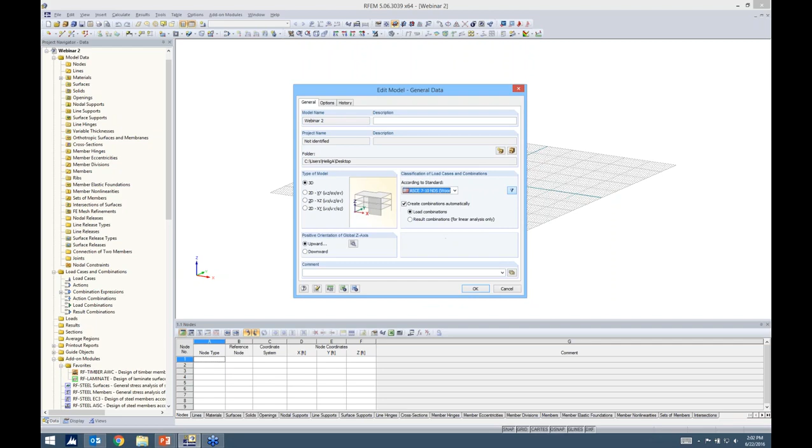So with that said, I'm actually just going to go ahead and jump right into RFEM. I'm going to use the PowerPoint concurrently with RFEM because I really want you to know how to apply some of the theories in the program as we model. So when you launch RFEM, this is the dialog box that you'll receive, and you just simply need to go ahead and give your model a name and define the type of model, 3D, with the orientation of the z-axis upward. For our load combinations, we actually have in here ASCE 7 for 2010, the NDS wood load combinations. I check the checkbox to create these automatically, then we simply click OK.

So some of you are familiar with RFEM, but for those of you who aren't, this essentially is the program. We have the tables for data input as well as our results down here at the bottom. We have our project navigator over here on the left. The project navigator can also be used for data input. We have our display tab down here. This is basically what controls everything in our view window here. We have views, which we'll be using today, and then once we run our results, we should get another tab down here that says results. And then, of course, we have all of our toolbars at the top for our modeling purposes as well.

So we want to begin today with our walls, and typically with walls we would want to go ahead and model them in this vertical direction. What I find actually easiest is to use line elements to begin with, and up here we just go ahead and choose new line in the toolbar, and you'll hear me say this quite often. We have a lot of AutoCAD-like features, which I think is one of the more powerful capabilities in RFEM. So not a lot of time will be spent trying to create very complex geometries because we have all these capabilities within the program itself, such as splines, polylines, arcs. So you can see for line options, we don't have only the typical straight line, but we can, of course, choose any one of these. For our application, we'll just go ahead with a single straight line.

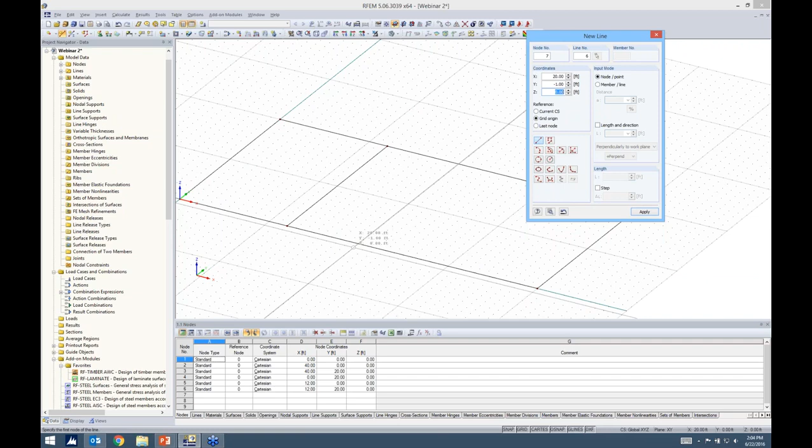Now all I'm doing is just using my drawing grid to draw a 40 by 20 outline of my building here, and you'll notice that I just snapped to the different points, and I'm going to add an intermediate wall, maybe right here at 12 and one more at 20. So we have nothing more than just these 1D line elements here, and what I can do is I can just select them, and I can right click, and under line I can go ahead and extrude the line into the surface. Something to note here, these are going to be cross-laminated timber panels.

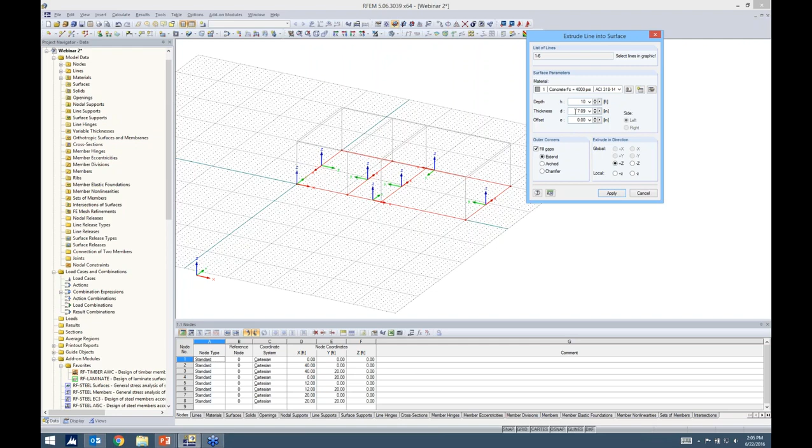So cross-laminated timber is not available in RFEM. In order to define all of those different layers and properties, we have to use our RF-LAMINATE module, which we'll be spending some time in a little bit later today. So it's worth noting that the material here for our panels doesn't matter. We can just go ahead and choose something very general such as concrete or steel, because all of this is going to be overwritten later by the add-on module RF-LAMINATE. So for now, concrete is fine. I want a height of 10 feet. The thickness doesn't matter either. That will be overwritten as well. So I hit apply, and now we can see that our walls are quickly generated.

Maybe we want to add some openings in these walls, and for this I'm going to go ahead and change my work plane. And you'll notice that that work plane is just on this front wall of this structure. Work planes are important because when we continue modeling here, the work plane really confines where you're exactly drawing your elements. So I don't have to worry about drawing clear out in space, or maybe accidentally drawing on this back wall. I'm going to be drawing where this work plane is set.

So as far as openings, our other toolbar up here has all the different openings. And again, we have just the typical rectangular opening, but we have all of these other options. So this can be super powerful when you're doing finite element modeling, or maybe you have a structure with some odd geometry for different openings in a slab or a wall. You can see here ellipses, polygons, anything that you really can think of.

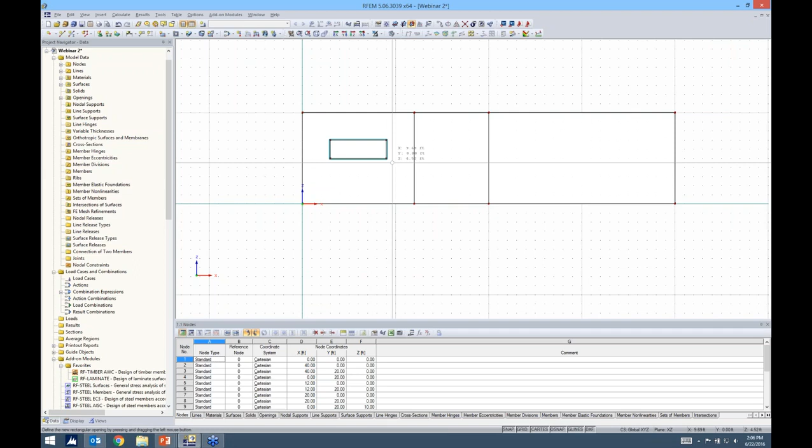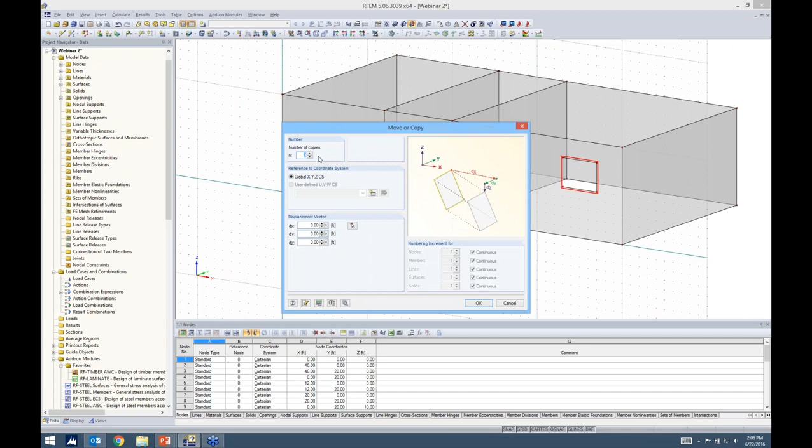For us, we'll go ahead and stick with a rectangular opening, and basically I'm just going to draw some windows here, nothing too complex. Maybe we want to draw a door opening here, and lastly a window over here. Now, as far as the windows for the back wall, I can just hold down my control key to select these openings. I'm going to use my move tool, and I'm going to create one copy and move it back 20 feet in the Y direction.

You'll notice I'm kind of going through modeling maybe a little bit quick. We have plenty of other webinars that have more basic modeling. I really want to get to the CLT and timber design, so that's why it may seem a little bit quick in terms of all of the modeling behavior.

Okay, so now that we have this defined, I'm going to go ahead and change my line grid now for my floors. I simply change the work plane again, and you'll see how quickly I can define my different origins, and now I'm at the top of the structure. We have this other button up here, and what this does is I can select all of the model. Now, instead of a single continuous line that previously existed up here, these are now broken up where the wall panels intersect.

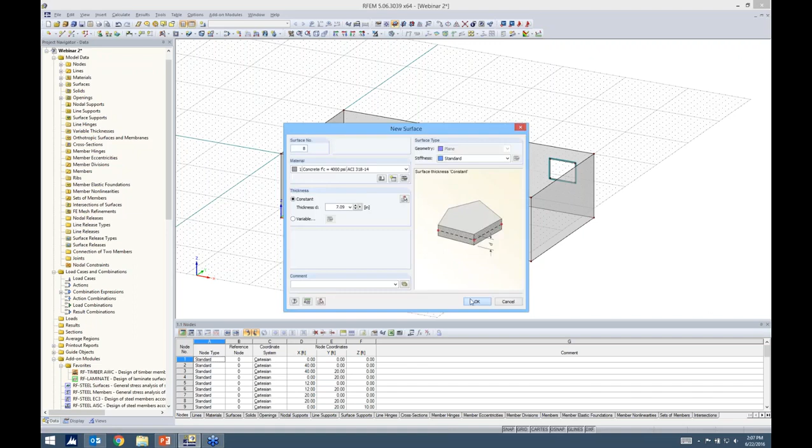And the reason for that is now I can create a surface by selecting my boundary lines. Again, the material doesn't matter and the thickness doesn't matter. This is CLT that we'll override at a later point. So now all I need to do for my floor elements is select my boundary lines and then do so for the second diaphragm. And we have our first floor.

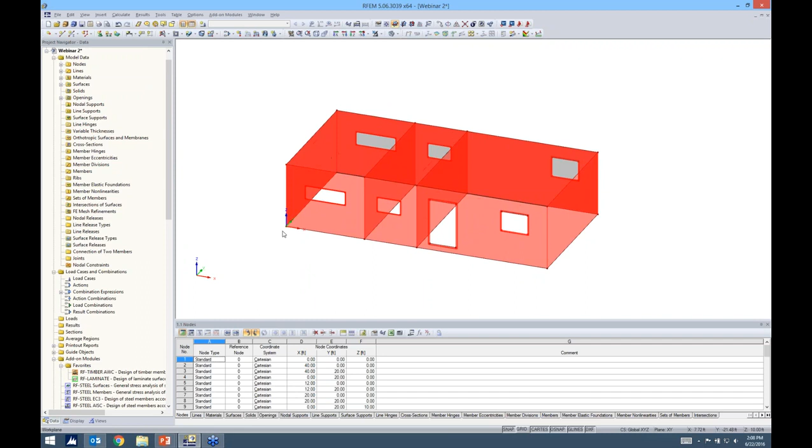Now we want to create our second floor. Well, that's just as simple as selecting our walls, and I was careful not to select the floor panels. I hold down my control key and I just drag and drop. Dragging and dropping is a very useful feature in the program to really save on some time for modeling. Maybe I don't want this opening up here at the top. I can just select it and delete it.

Now we want to create a pitch in the roof. So for this, I'm going to turn my rendering off to only a wireframe model. This way I can select all of these lines at the roof level and right click. I'm going to divide the line by n intermediate nodes, and I'm going to place one intermediate node at all of these lines.

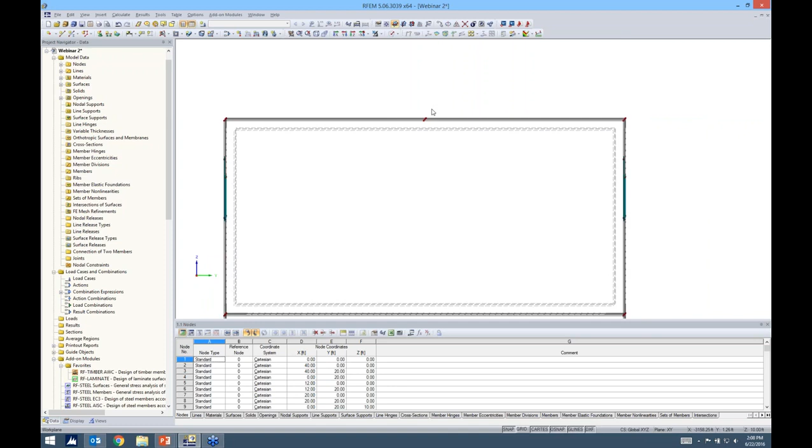So pretty simple. Now what I want to do is highlight only these nodes, and I will use our move and copy tool. This time, instead of creating a copy, I'm going to move these particular nodes in the positive Z direction 3 feet. So now you'll see that we have a pitch in the roof. Fairly straightforward.

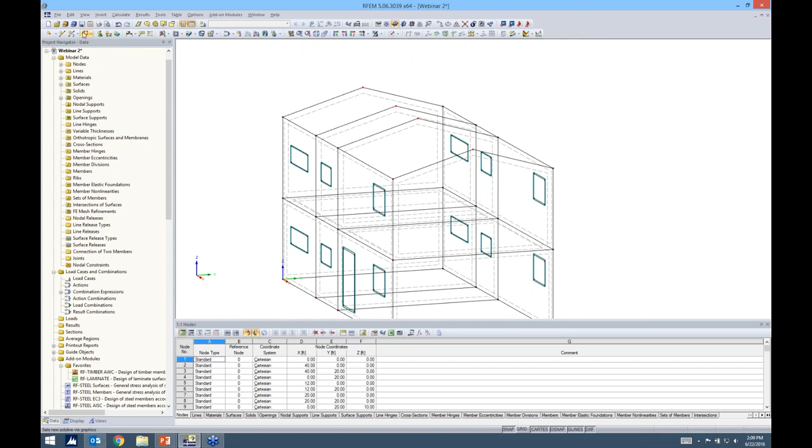So what we want to do now is draw our timber members. We click on New Single Member here, and you'll see that the member type is considered a beam. Several other options here, but for this type of application, we just want a typical beam member. We want to create a new cross-section, and up pops our cross-section library. For this, I want to choose standardized timber.

Then this dialog box will pop up for all of the different standardized timber sections. We can further filter according to AWC. We also have CSA in here, depending on which type you're exactly looking for.

You can also go ahead and choose a favorites group, and I created this favorites group USA, and basically I just added in a couple shapes that I'm using for today's webinar. So rather than sifting through all of those different shapes, you can create as many favorite groups as you like and add or delete any of these shapes here.

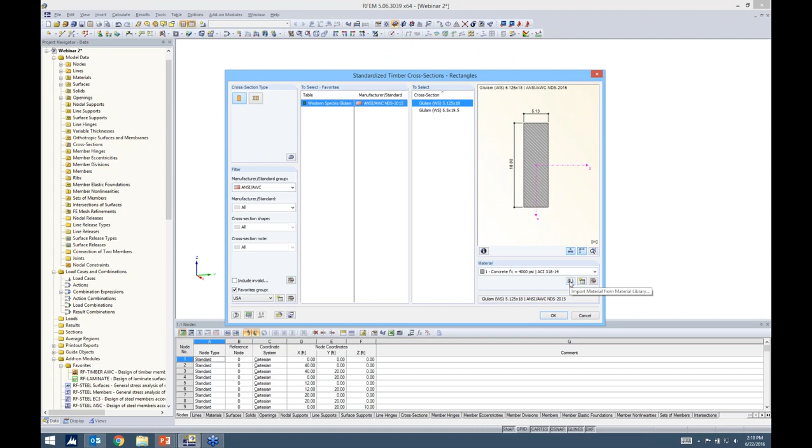Concrete won't suffice for this timber member, so we need to go ahead and define our timber material. For this, I go into my material catalog. Of course, we want the timber filter initially, and then you'll notice that we have all of these further filters. For our application today, we want to be in North America because North America contains the AWC materials and the CSA materials. Even for AWC, it's quite an extensive list.

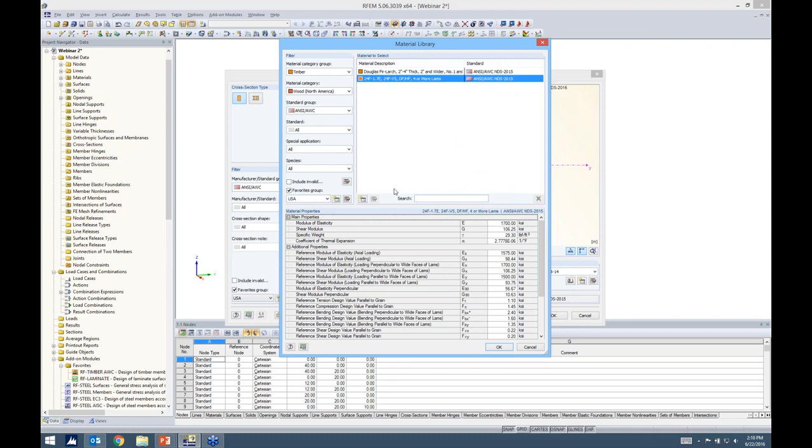You do have the option to search here. Again, though, I added it to my favorites group. So for this particular member, I'll use a 24F-1.7E for my material. All of the material properties are shown right here, so very easy to access. Now it looks like we have something more like a timber material. I can click on this info about cross-section. I can get all my cross-sectional properties just at the click of a button.

Now, one thing to note here, if I go ahead and click on my edit material again, and I look at my particular material model, this list isn't really as extensive because I only have a 1D element chosen right here, but I'm going to jump back to the PowerPoint.

All material models are listed here available in RFEM, and technically timber is considered viscoelastic, meaning that the strain rate is dependent on time. But realistically, we can't model viscoelastic in software. It's just very complex. So we will just go ahead and consider it elastic. This is basic behavior of modeling of timber.

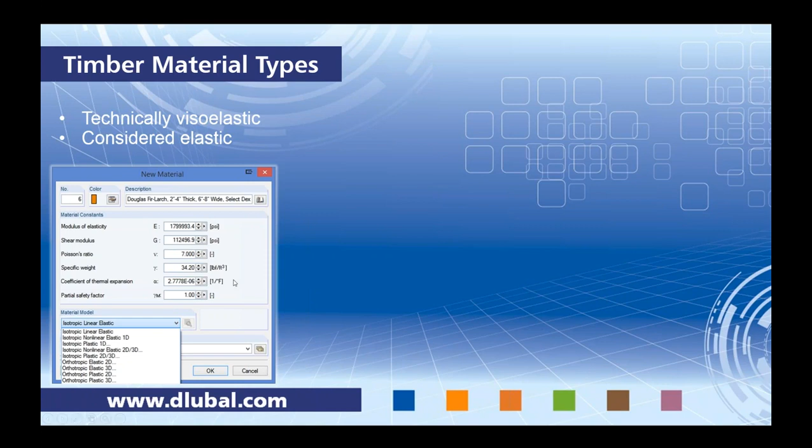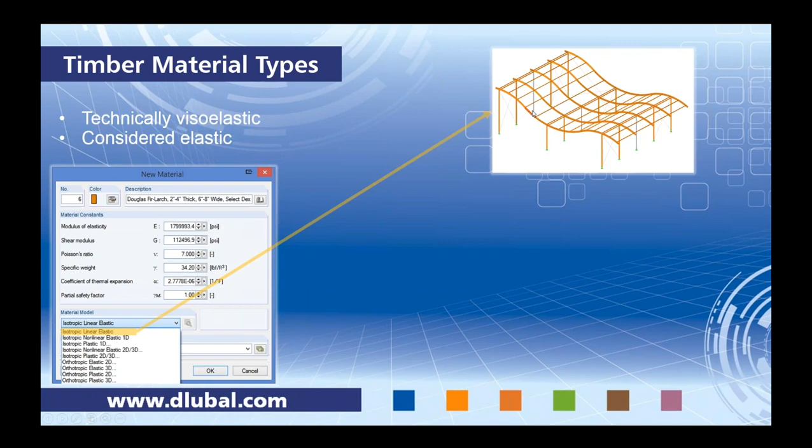However, I want to differentiate the different material models for our different elements. So for 1D member types, such as we're modeling right now, we'll use isotropic linear elastic. For 2D surface elements, we're using orthotropic elastic 2D. Most of us know what orthotropic is. It's just where our material properties are different in the X versus the Y direction for each surface element. And lastly, we have the solid model, and for that same concept, except for now we have 3 directions for a solid.

Okay, back in RFEM, if I go ahead and click OK, and you've used RFEM before to model timber, you'll notice this error message that pops up every time. And this error message is saying you must have incorrectly defined your material. Poisson's ratio is greater than 0.5. The calculation is possible, but only E and G are applied. Is this okay? So I really want to explain what's going on here, because some of us may just click yes and not really know the logic behind why this program's throwing up the error.

So timber is actually anisotropic. The properties are changing with the direction along the object. This is pretty apparent for timber. However, in the program for 1D members, we only have the option for isotropic, and isotropic materials use this equation to calculate the Poisson's ratio. It's modulus of elasticity over 2 times the shear modulus minus 1.

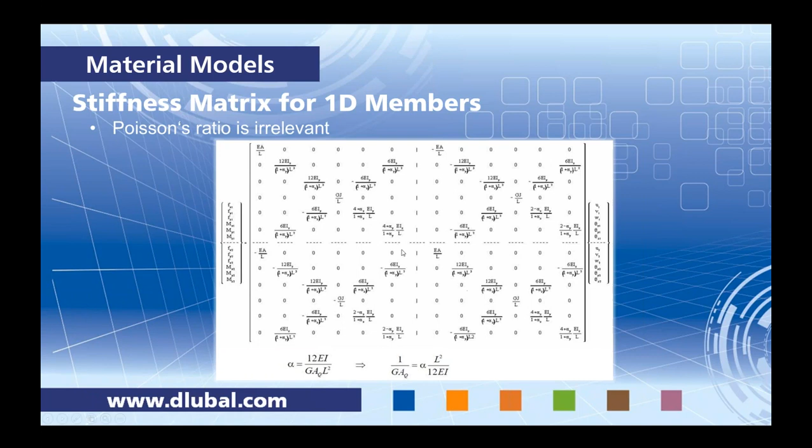And the reason why is because if we look at the stiffness matrix for a 1D member, Poisson's ratio is irrelevant. You won't see Poisson's ratio referred to anywhere within this stiffness matrix. So the fact that only E and G are applied, which obviously are present throughout this matrix, that's fine. Not using Poisson's ratio is not a big deal.

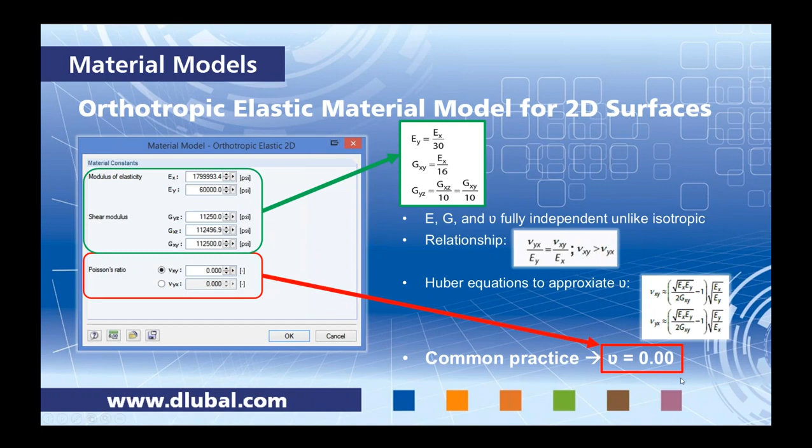Back a couple slides when I showed you this equation, E over 2G minus 1, well this is actually not applicable for orthotropic 2D surfaces. We do have a relationship with Poisson's ratio and the modulus of elasticity, and there are equations to approximate Poisson's ratio, but timber cut down on the East Coast and the exact same species on the West Coast will have a different Poisson's ratio. So there's really no way to get that exact number. Therefore, it's common practice to just use Poisson's ratio equal to 0. The program is set up to default to 0, so that's why we use 0.

Looking at orthotropic 3D solids, same exact concept, except we're now adding in a third dimension. Same equations that relate E and G. You'll notice our Poisson's ratio is still 0. And then I wanted to quickly show the relationship of shear modulus for something like a solid.

GXY and GXZ, these are equal. This makes sense, they're running parallel to the grain. No matter which way I flip this member, I should have the same shear modulus. But when we're looking at perpendicular to the grain, it also makes sense that we should have less of a shear modulus for GYZ, which is how this equation relates the three.

Okay, so jumping back into RFEM, here's this error. We can go ahead and click yes. So that's kind of where that's coming from, and then I can click OK again.

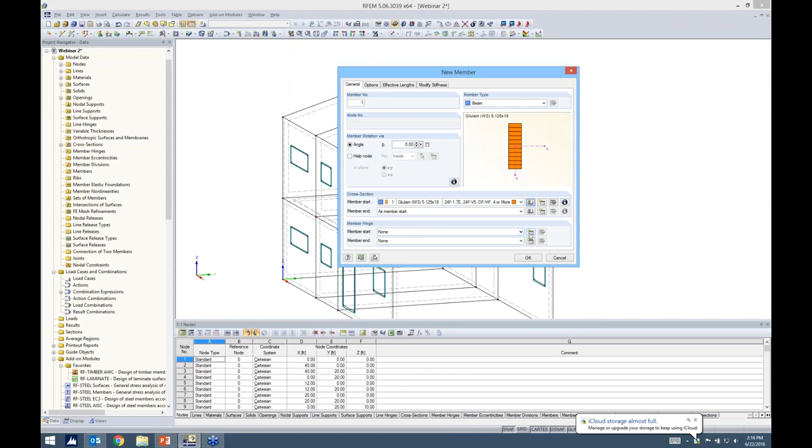Something to also note, we want to go ahead and apply some member hinges to this end. I want to go ahead and create a new member hinge, and the default here is to go ahead and create a pinned release to release rotation in the local Y and Z axes. There's a nice picture here if you don't understand exactly how the local axes are laid out.

Also, you have the ability to really get into nonlinearities if you choose, such as partial activity. You can define your own diagram, plastic hinges, but you'll notice everything is pretty well hidden if you just want to keep it as a typical pinned or fixed release. So these nonlinearities are possible, but yet it's not overwhelming that you have to sift through all this information just to get your typical release here.

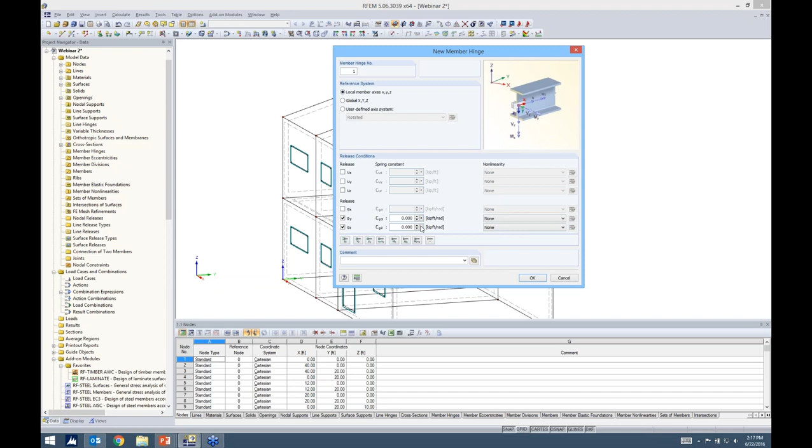So for the member start and member end, I'll use a pinned release. And here I'm just going to go ahead and model this member between each of the walls. The reason why I'm doing it between each of the walls, I want the pinned connection at each wall. I can go ahead and choose the rendered view again, and we can see how that timber member is applied to the roof.

Now, the next thing that we want to do is to go ahead and draw in our rafters, and we'll go ahead and create a new member again with a new cross section, this time a parametric timber, and all I need to do is type in 4x8. Now, I don't want this same material. I'll go ahead in my material library. Under my favorites group, I already have Douglas fir larch put in there. I click OK, I click OK again.

Now to address the member hinges. I think where the first rafter joins this larger ridge member, I want a typical pinned release. That's fine. However, for the member end, where we're framing into this CLT wall, I'm going to define a scissor release. And what exactly is a scissor release?

Well, a scissor release is where we have 4 members framing in together here at this single node. However, the continuous members, such as 1 and 2, will go ahead and transfer moment between each other. Same with 3 and 4, but we don't want to transfer moment to the perpendicular member. We only want to transfer axial and shear forces.

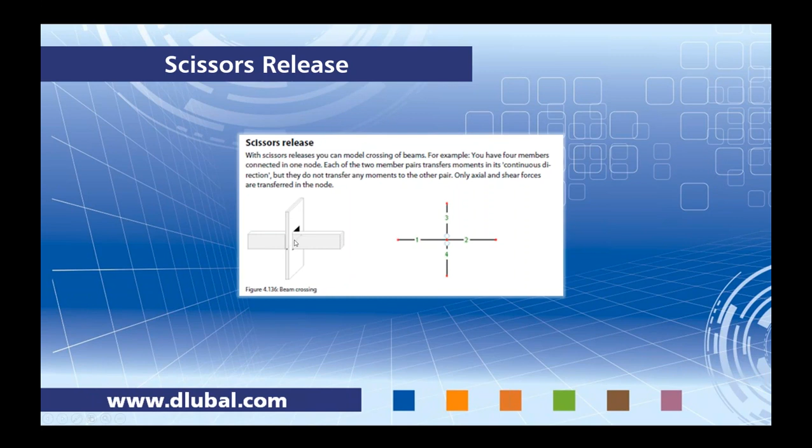So I think that this is best illustrated, and by the way, this was just taken from our manual. This is best illustrated with a beam or our rafter passing through the wall. You can see that moments will certainly be transferred for the items considered individually, but considered together, we don't want to transfer a moment to each other.

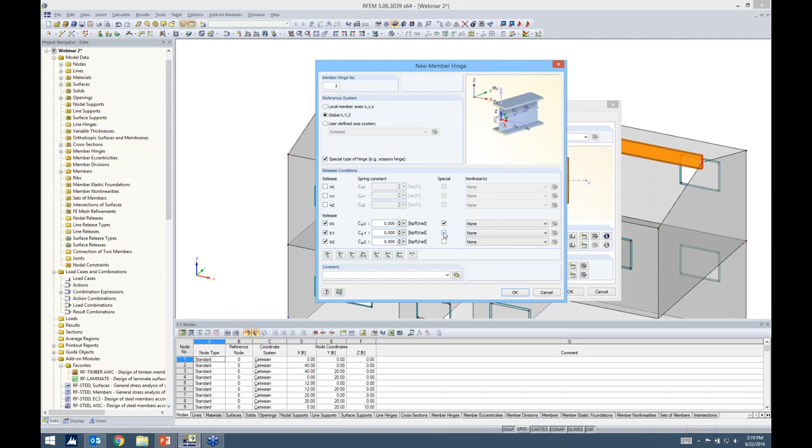So we will go ahead and go back into the program, and under the member hinge, we'll create a new member hinge. And here, instead of the local X, Y, and Z axes, I'm going to create a global X, Y, and Z. Then you'll notice that this option pops up here for a special type of hinge. And with this, I can now go ahead and check this checkbox for special and release all rotations.

If I click OK, you'll notice that the program denotes this as a little bit different from a typical release by putting an S on it for special. So I click OK, and then I just need to go ahead and draw in my first rafter. The other thing I'm going to do is use the drag and drop by holding down my control key.

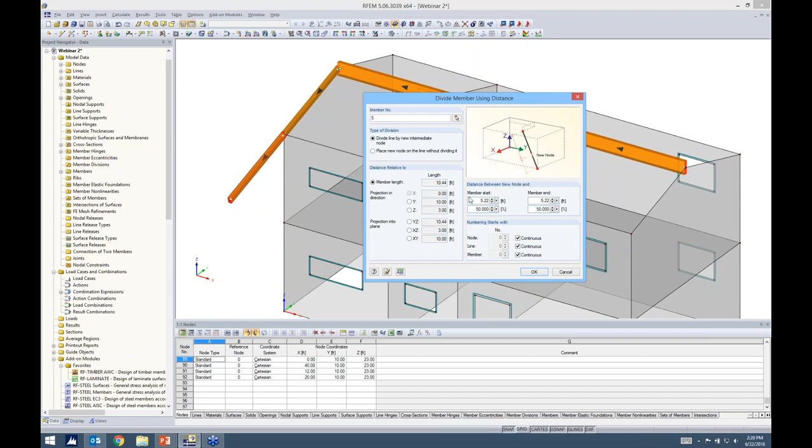I want to extend the member and adjust my member releases for the second one. I also want a scissor release at this location, so my member start, since I've already defined it, is available in this drop-down. Member end doesn't matter because I'm going to divide this member by a certain distance. When I'm in this divide dialog box, it's nice because I don't have to guess the member start and end - the program shows a little black arrow for all members indicating the start and end, or the I and J ends. So I'll divide it 2 feet from the member start. I click OK, and now I have 2 separate members.

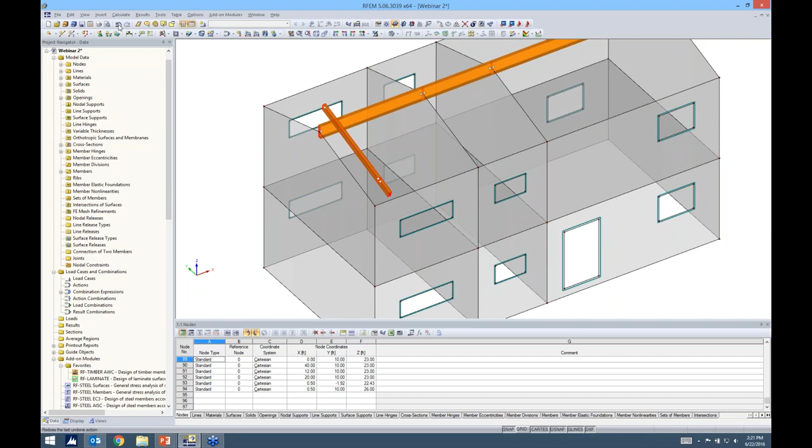I'm just going to go ahead and delete these. As far as the scissor hinge, I need to move it over slightly because I'm at this intersection of 2 walls, and the program will give an error since it's an odd connection at this particular intersection. So I'll select both by holding down my control key, use my move tool again, and in the X direction, 0.5 feet. Oh sorry, let me undo that - I also had the Z direction defined as 3, so we'll change that back to 0.

As far as the rest of the members, it's easy enough using our move and copy tool. I'm going to create 13 copies at 3 feet on center. I click OK. All the hinges, special types of hinges are there, and my spacing is correct, so everything looks good.

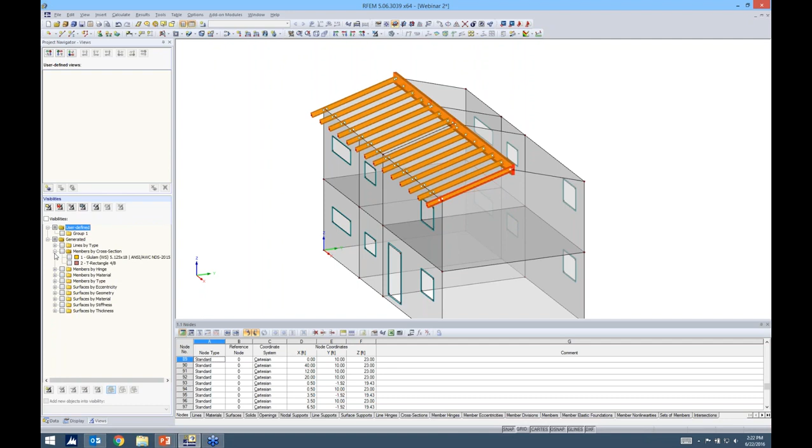Now I need to do the exact same thing for the other side. I could go through that whole process again, or I really want to utilize the tools in RFEM. Under this Views tab, you'll see all of these default options, basically to select different objects in the view window. For example, there's an option here, members by cross-section, so all my different members by the different cross-sections would be listed here. For me, I just want to select my 4x8s. You'll notice I can't really select anything else in the model, which is exactly what I wanted.

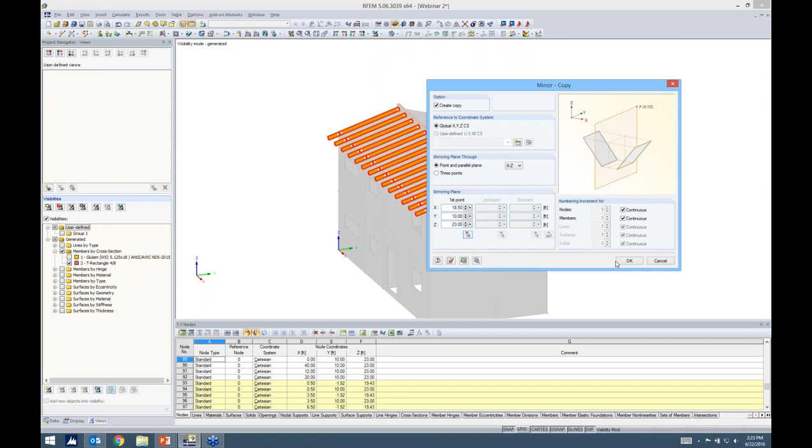Now I can highlight all of these, and we have the mirror tool, just like in AutoCAD. I'm going to create a copy, and it's asking which plane I want to mirror through - I want to mirror through the XZ plane. Then I just need to choose a point at which it will be doing the mirroring, so I choose any one of these top points. I click OK, and now I have my roof. So again, a lot of features to quickly model in here.

Okay, lastly for this, let me turn this into wire view. If I zoom in and select this floor panel here and choose visibility by selected objects, I'm really only looking at this single floor panel. Well, this floor panel is pretty long, and maybe I want to add in some type of beam along here. That's fairly easy to do, but I really want to drop it down so the eccentricity is included for the surface thickness as well as half the beam depth.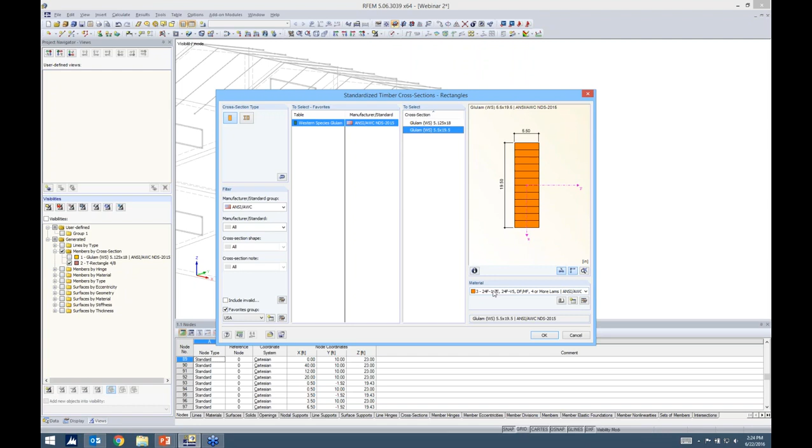With that, I can go ahead and create a new member, just like what we've seen before, create a new cross-section. I'll go into standardized timber here, and I'm going to choose my other glulam that was in my favorites list. Material's already defined, so it's perfectly okay to leave it the same as the other one. As far as my member end releases, I just want a typical pinned release. Now there's another option here called options, and under this options tab we have member eccentricity. If I go ahead and create a new member eccentricity, you'll see I can either choose an eccentricity by defining the length, either at the I or J end, or I can do a relative offset.

This is really user-friendly. I want to note, though, that when you're first in this, trying to apply these different eccentricities, it could take a few tries before you get exactly what you want, because the local axis is very important. And just because I've been in RFEM enough, I know that my local axes are opposite of what is shown here. So realistically, instead of choosing the top of the beam, I would choose the bottom here, because I know my local axes in here will be modeled with the local z-axis up.

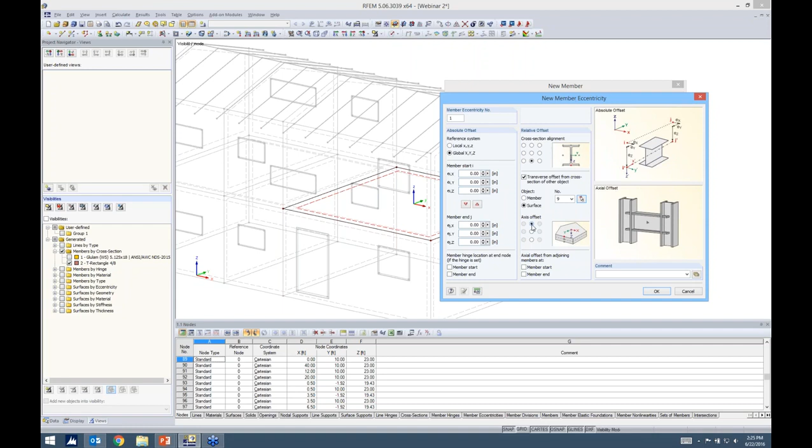Now it's asking, what do you want to offset it by? Well, I can choose either a member or a surface. So if I choose this surface and then graphically choose this surface I have selected in here, again, I know my local axes are opposite here, so I actually want to select the top here. And I went ahead and clicked OK. Then I can go ahead and click OK again, and now I can go ahead and model this particular beam.

You'll notice too that I don't need to model in extra nodes because of the CAD-like capabilities. My centerline snap point pops up, and I can choose the other center line. You'll also see a perpendicular line, so it's kind of nice in the sense that I don't really need to worry about drawing in an extra node there.

I can go ahead and render it to show exactly how this beam was dropped down. You can see the rigid links that were created, and these rigid links were created based on half the depth of the beam as well as the surface thickness.

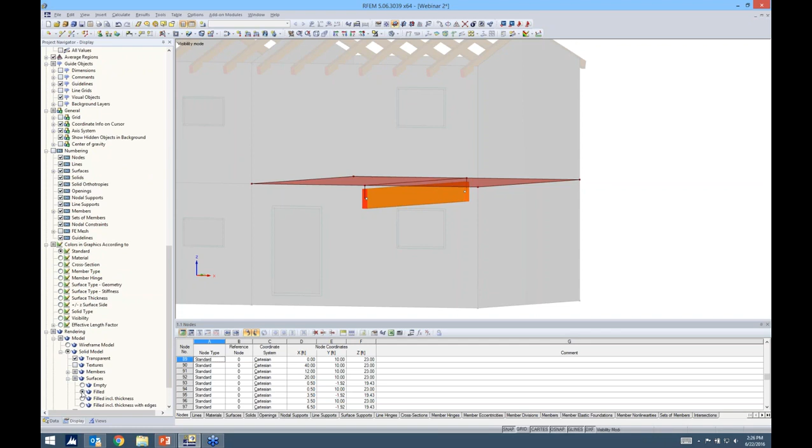So I can also go into my display down here in my project navigator, and like I said, this controls everything we're seeing here. I just want to show you guys that you can go ahead and render these surfaces to filled, so that you can really see how this beam is dropped below that particular panel. Okay, I will go ahead and cancel my visibility mode here.

And the last thing that we want to do is go ahead and add some line supports here. Line supports can be applied, let's say, to the bottom of these walls. Default, hinged and rigid, pretty self-explanatory.

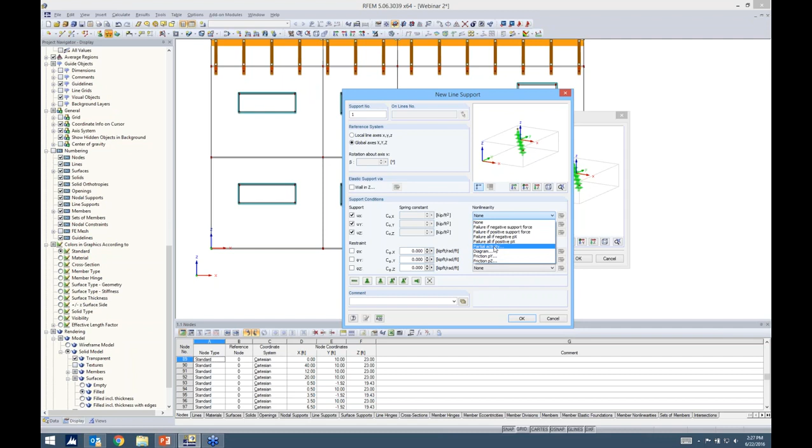If I create a new support, again, just like member end releases, you really have the ability to dive into these nonlinearities. If you have friction, if you have partial activity, if you have sliding, all of these are possible with these support reactions. So we're not going to get into this today. We'll keep it as a linear support, but just know that it is an option.

So for us, we'll just keep it as a typical hinged, and we'll apply it to all the bottom of the structure. Okay, so our modeling is essentially complete for the structure.

Now I want to go ahead and quickly add in some loads. For this, I'm going to go ahead and create some new load cases, and that's just opening up our load cases and combinations dialog box.

So the first load case will be dead, and we want to go ahead and keep the action category as dead, and you'll notice self-weight is activated for it. I create another one, I'll call this one live, and we'll assign it to live load.

We need to pay careful attention to the action category, because this is how the program assigns these load cases to the ASCE load combinations. If you incorrectly define an action category, you're going to get the wrong load factor. So keep in mind that these are important when you are assigning your load cases.

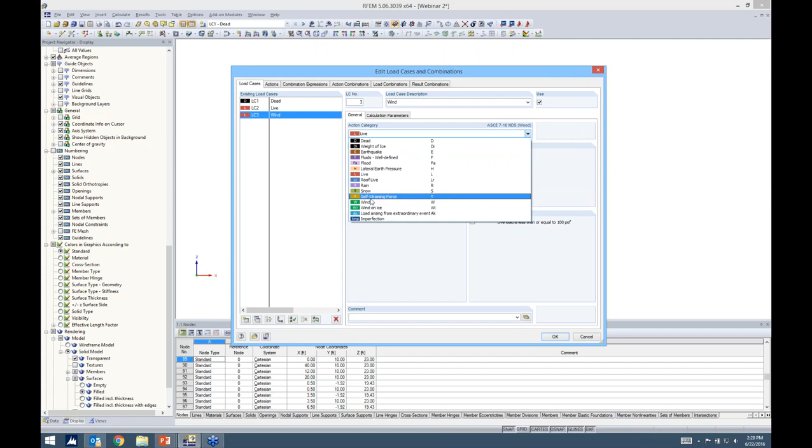We'll go ahead and assign wind here, and we'll assign it to wind, and lastly we will assign snow to snow. Okay, so I can click OK out of here, and you'll notice that when I'm looking at my drop-down box now, which previously was empty, I now have all of my load cases, and then the program went ahead and automatically created all of my load combinations according to ASD and LRFD.

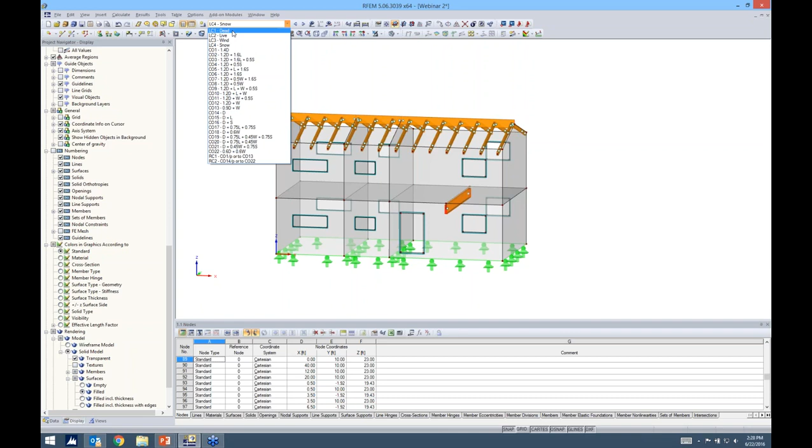For now, when you're applying loads, you want to make sure that this is set on the correct load case that you want the loads applied to. So I think what's easiest here is to go ahead and highlight our floors and make this visibility based on the selected objects.

Then I can go ahead and just quickly add surface loads to my first floor. I just go to new surface load, and you'll notice here that, again, you have the options to really get into depth for your surface loads. For us, we're just going to keep it as a typical force uniform. And as I scroll through these different load directions, this little picture updates here, which is nice. So you can see exactly how you're applying it in your model.

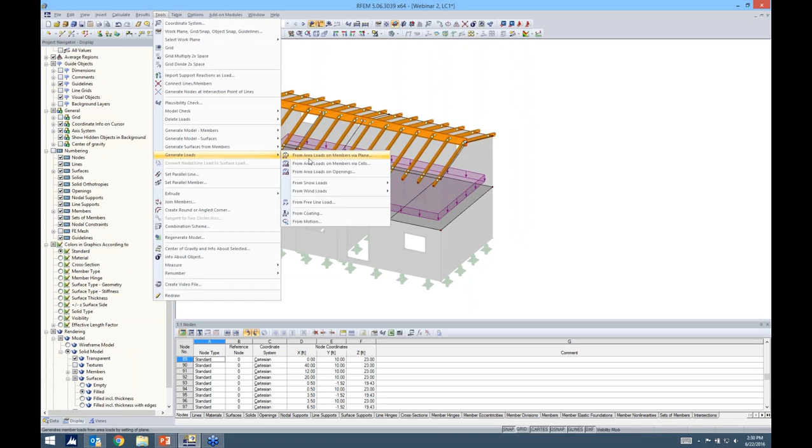For us, we will just go ahead and stick with the ZL direction in the negative direction with our magnitude at -0.1. I click OK, and it's as easy as clicking on the surfaces. Now, for my members up at the top, I want to use our tools, generate loads from area loads on members via plane. Again, we can scroll through these different options. I'm going to stick with the typical ZL.

And what this is going to do is we're going to apply an area load, and it will actually distribute the line loads based on tributary area to all the different members. Now my magnitude will be -0.05. The program's asking me, okay, well, where should I apply it? And I need to give it some area loads.

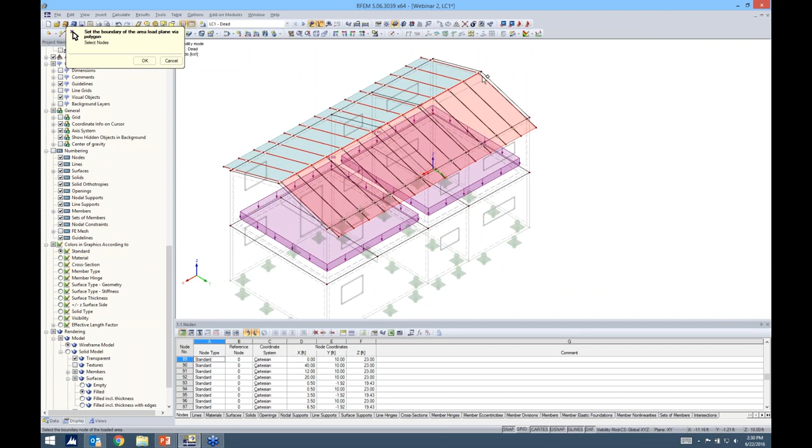I can change this back to my wireframe, and I'm going to select first the one side of the structure, and I'm going to go ahead and select the other side as well. So this will just be taken into consideration when the program is applying this dead load to the roof members. I can actually also, which I think is a nice feature, remove the influence from single members. I can remove the influence from all members parallel to a certain member. So if I choose this option, maybe I don't want the dead load applied to my ridge member.

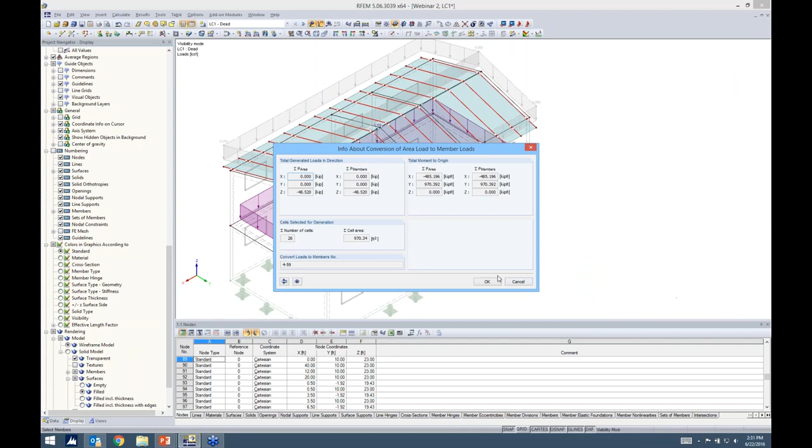I click OK. I click OK. Up pops some math, just showing you exactly how that was applied. I can also right-click and display it separately. So without solving, I can already see what these loads are on the member, which is nice. For a little bit of a cleaner look, we can keep it as a single load.

Now, quickly going through live load, same thing. We'll just apply a surface load in the ZL direction, but our magnitude will be a little bit less. And we can just go ahead and apply it to these two surfaces here. Now, wind is obviously a little bit different. We could technically do some calculations according to ASCE. And just to let you guys know, we do have the ASCE load generator for wind loads in our internal version now. So I'm hoping that that will be released fairly soon.

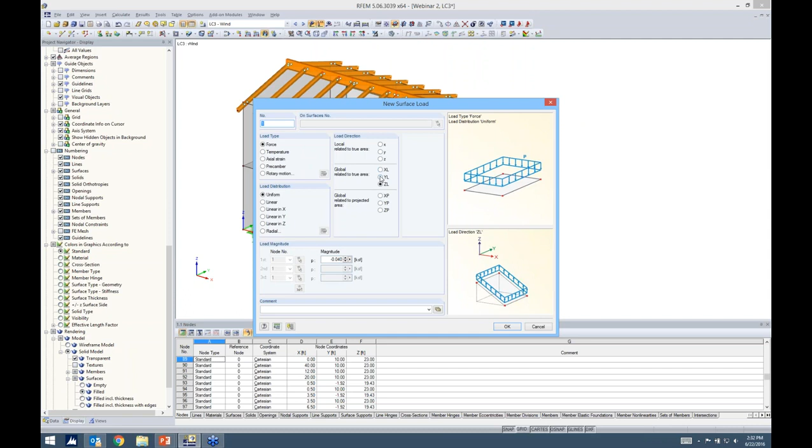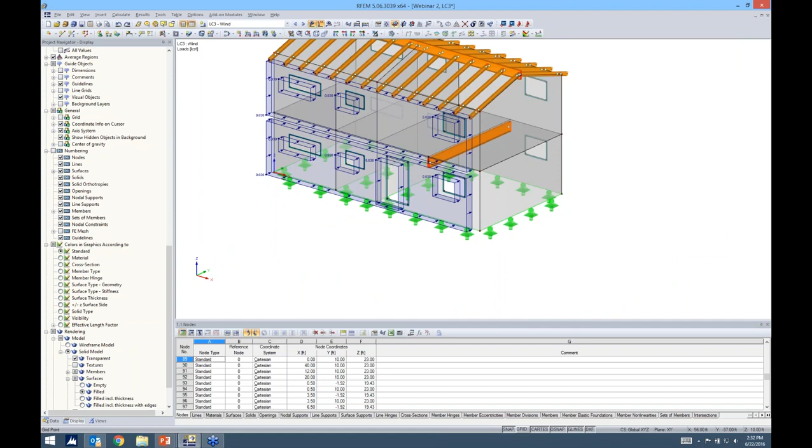For today's sake of time, I'm just going to apply a lateral surface load. I'm going to apply it in the Y direction with a magnitude of 0.03. And all I need to do is click on my surfaces. You'll notice my openings were taken into account. Maybe later I decide, okay, well, I don't want this opening. Well, if I delete it, the load is automatically filled in that particular opening. So everything is very automated in the program, which is nice for a lot of the changes.

Now, lastly, we have snow load, and for this, I do want to utilize our load generator from snow loads for a duopitch roof for ASCE. For this application, I think this is nice because if you're used to snow loads according to ASCE, all of these factors will look very familiar. If by chance you're not sure on a factor, if you click this info button, these are all the tables that are taken directly from the code. So it's nice that you don't necessarily have to flip to the code in order to get some of these factors.

The same with the ground snow load. We actually incorporated this map here, and we can double click on, let's say, our structures in South Dakota, and it will automatically come up with our ground snow load. The roof geometry needs to be defined, and one important thing to note here, you can't just click all over to create your roof geometry. You really do need to follow these same guidelines as what this little window is showing you. So with that, I can easily just go ahead and choose my roof geometry based on my rafters here.

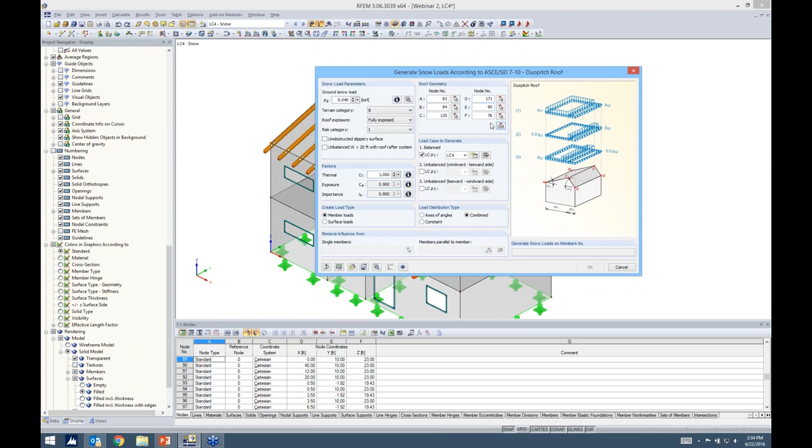And the program jumps back into this. Now, I'm just going to do a balanced load case, and you'll notice it automatically assigned it to our snow load. And if I go ahead and click, sorry, for some reason I must have not selected my roof area load correctly. Let's try that over again. No. Okay. Well, regardless, we can go ahead and apply the snow load here.

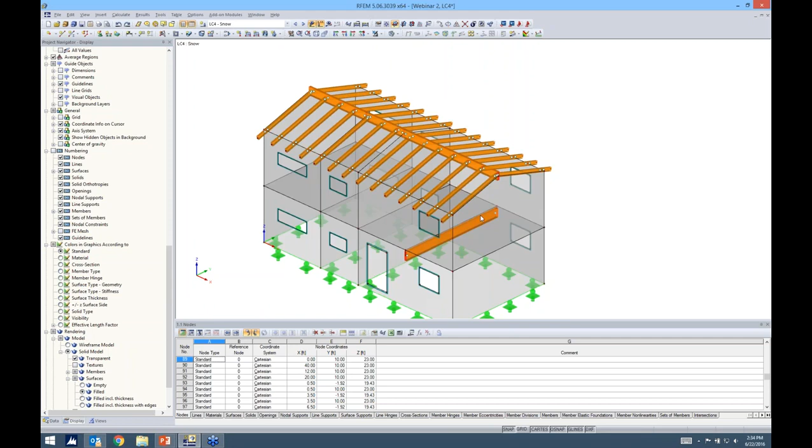If I go ahead and generate my loads again, I think there might have been some issue with the load generator in terms of my roof geometry. So for this, I can actually go ahead and select my options again, but this time I'm going to turn it into wireframe to see if that works a little bit better. Maybe I was not selecting a proper node.

Okay, much better. So that's a good point to make, that if you don't correctly define this roof geometry, this OK will be grayed out. The program's smart enough to know that something's slightly wrong, so you do need to address something in your data here. So for me, I must have clicked on a wrong node someplace. We can exclude the members parallel to member 1 again, and I click OK.

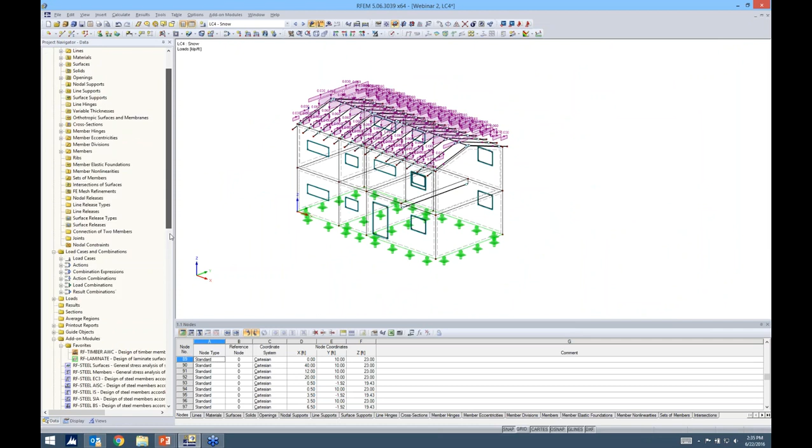Up pops my calculations for the ASCE, and then you can see here that again we can right-click and display separately, and we get a nice layout of how the load is being applied to all those different members. Okay, so now that we have all that, we can actually jump into the laminate module. So RF-LAMINATE here. I want to go back to the PowerPoint to describe what we're doing in RF-LAMINATE.

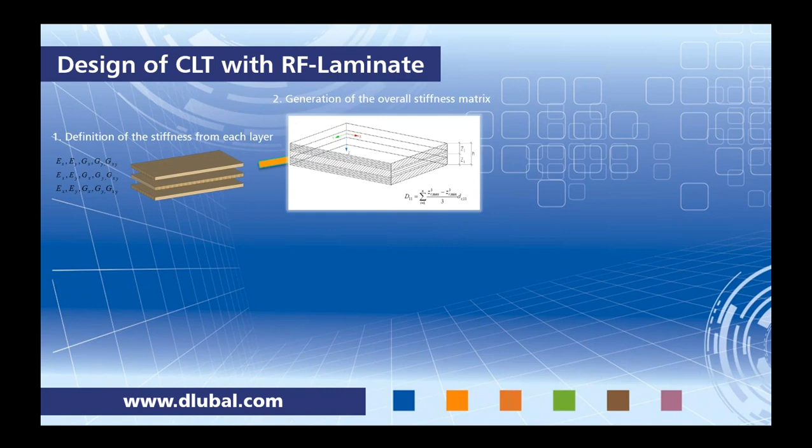So in this module, we're actually going to define the different layers of the CLT panel. Now, each layer is going to have its own properties, such as our modulus of elasticity and shear modulus. And we'll go ahead and create a stiffness matrix for each layer. Now, also in the program, it will take each layer and then create an overall stiffness matrix. For example, this is an example from the D11 entry in the stiffness matrix based on all of the different layers. Then the program will export these correct stiffnesses back into RFEM.

So we now no longer have those concrete panels and floor panels and such, but rather now we have the laminate panels with the correct stiffnesses. The program will go ahead and run all of our load combinations based on ASD or LRFD and get all of the internal forces. Then it takes those internal forces back into RF-LAMINATE. It will distribute all of the stresses to each layer based on these differential equations here. And maybe more graphically, you can see the stress distribution throughout the depth of a cross-laminated timber panel. It would look something similar to this.

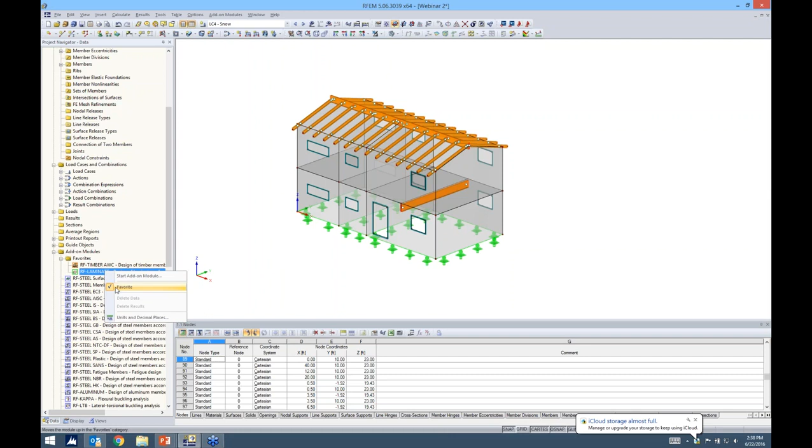Then for each stress, we're actually going to separate it into tension, compression, and bending components. Then we take those stresses and compare them to what the code's giving us for our limit stresses, and then we're going to get a code check. So essentially, that's how RF-LAMINATE is working within the program. So I'll go back to my rendered view, and I have a multitude of add-on modules, but I added the ones I'm in most often. You can just right-click and check favorite to move it up to the top, which is nice.

So I'm launching RF-LAMINATE. When I say add-on module, this is the add-on module. It looks like another dialog box. So I don't have to remodel anything. I don't need to worry about linking data together. Everything is all within RFEM. And the other thing for these add-on modules, you just want to work from top to bottom with the input data, which is given here on the left. So just work down this list.

So the first thing it's asking us is what surfaces do we want to design? I can check this checkbox all, so all surfaces are now selected. Now for standard, we want to choose the NDS-2015. And you'll notice we have both ASD and LRFD. I'll go with ASD. Therefore, I want to select my ASD load combinations from ASCE. So here I can just select the ASD load combinations, and these are what I'm going to use for my design.

Serviceability is if you want to do a serviceability check in the program. And under the standard, you can set here your limiting deflections. Today, we're not going to do this, but just to note that that is there.

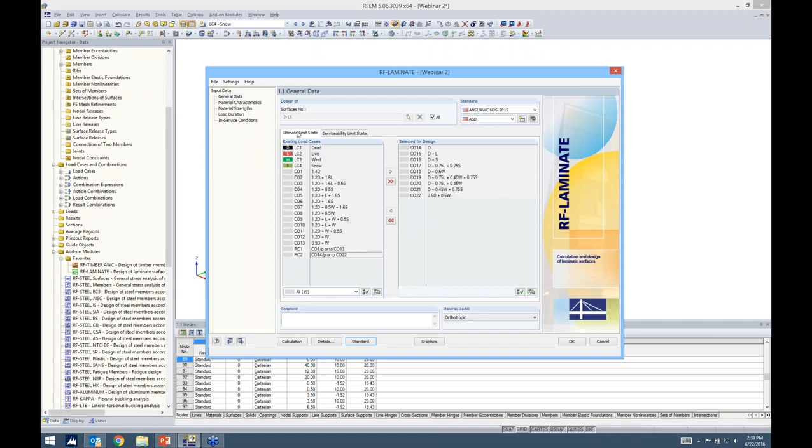Material characteristics. So the first thing we want to do is to define the first composition. So here, I'm going to title this one walls. And you can, of course, go into your material library for timber, and you can add in all the different particular material types, whatever you'd like for this. Give it a thickness and a direction.

You can see the materials listed here. I have a nice picture of how my materials are actually layered, and it's going to ask me which surfaces I want to define. So for this, all I need to do is just to select my walls. I click OK, and that is automatically done here. Now I'm going to create a new composition called floor. And same exact thing, we'll get this from our material library, but I'm just going to increase the thickness to 6 7/8.

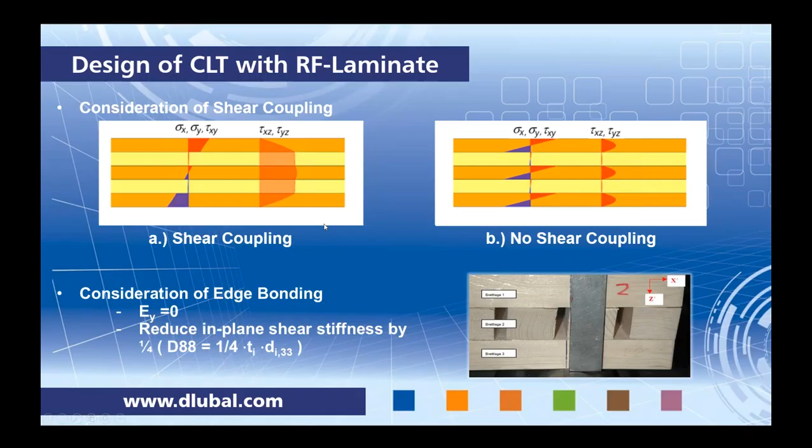Now for shear stiffness elements, this gets a little bit more complex. If we take a look at basically any type of rectangular section, we will always have a shear stiffness reduction, and for homogeneous rectangular sections this is set at 0.8. However, for CLT, we obviously don't have a homogeneous section. We have all these different layers, so we can't really make this assumption here. For our shear stiffness, we do need to somehow determine that, and it is the shear correction coefficient times G times A. Now, what is this K, though, for cross-laminated timber?

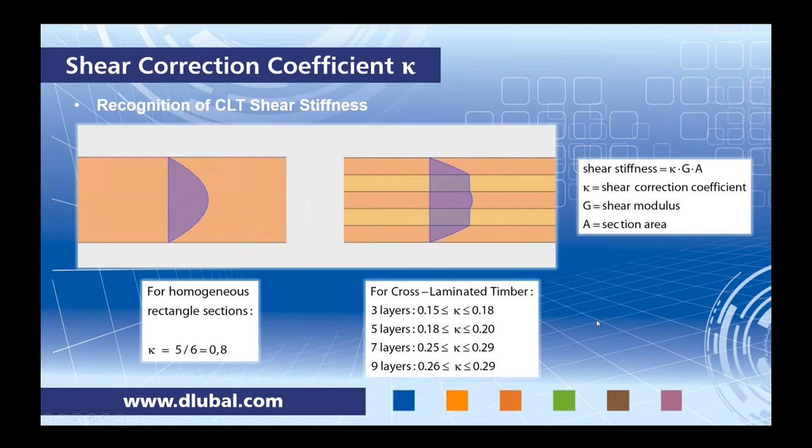So there are several suggestions from research to use these ranges for 3, 5, 7, 9 layers. The question is, what if we get to a point where we have 10 layers? Or what if we really want an exact coefficient within this range, but we don't really know where exactly we fall within this range? Well, the good news is that the program does this automatically.

So shear stiffness coefficient calculations according to general research and regulations, and this is also in the CLT handbook for the USA. It gives this equation for the coefficient, and it's pretty complex, as you can see. Now, when you're looking at RFEM, all of these insanely long calculations are what RF-LAMINATE is doing in the program to determine the D44 and the D55 entries in our stiffness matrix. So it's actually going through all of these calculations to get these values.

Now, if you're an engineer and you have a lot of time on your hands and you're just dying to know what this coefficient is in the X and Y directions, you can actually take these values, the D44 and the D55, which we give in the program, and back calculate to find out what those shear coefficient reductions actually are. So you'll notice that D44 utilizes this and D55 as well. So as I said, you can back calculate.

Going back into the program, if I click on this info button here, I can open up my stiffness matrix for this particular composition, and I can see D44 here, D55. So these are the values that you would want to use. So going back to this option here, this is something that you probably won't be changing unless you really know what you're doing, because the program is automatically calculating this for you. So just keep that in mind when you're in these details options here.

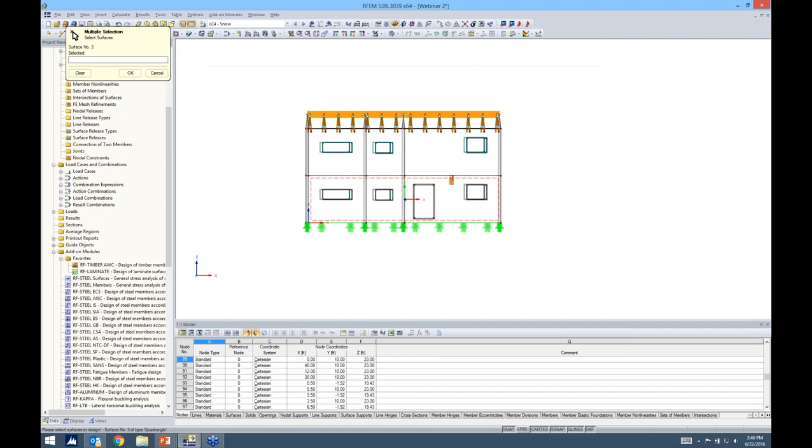So if I click OK here, let me go ahead and go back to my floor. I forgot to assign my surfaces to my floor. And I click OK. Now, I look at my model, and you'll notice now they're blue. I double click on them. They're not concrete anymore. They're now RF laminate. In order to edit them, you need to go back into the laminate module. I can right click and display my local axes. Now notice that all of my local axes are in the horizontal direction.

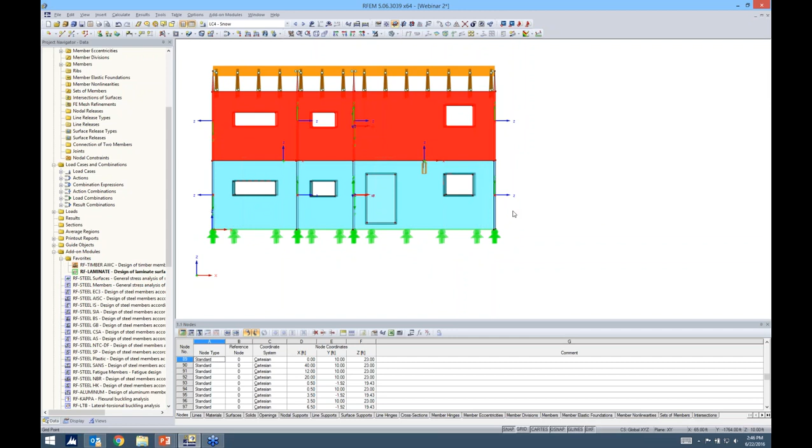This is not good. We want these strong layers to be oriented in the vertical direction to take those gravity loads. So I could sit here and change the orientation of all of these surfaces, but better yet, we have a quick feature in the program. If I just select all of my wall panels, I right click and I go to Surface Edit, there's an option here called Axes. And under Axes, there is the option Axis here, and I can actually set all of my local x-axes parallel to a line that I choose in the model.

And I'm just going to choose this vertical line here, and I click OK. And now you'll notice that all of my local axes are now oriented in the vertical direction. These ones come from the floor panels, so we don't need to worry about that. So again, very important detail. Otherwise, you risk your results being inaccurate because you haven't oriented the direction of the layers correctly.

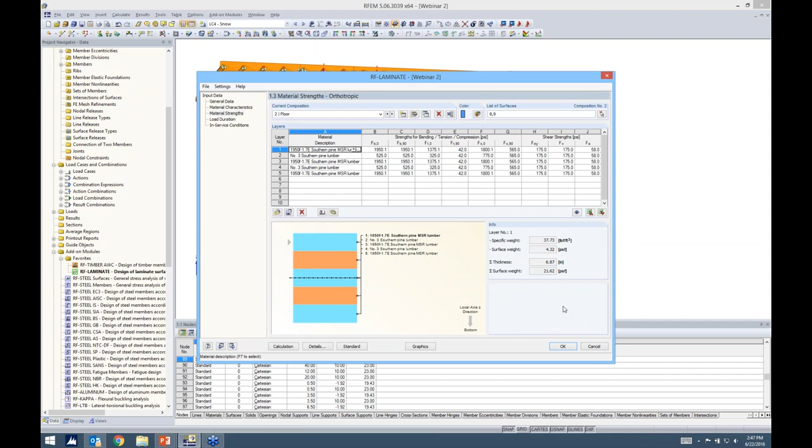Okay, so going back into RF laminate, we can continue moving down here. Actually, one more thing I also forgot to do. Along with the orientation of the axes, you'll notice here that we have our walls framing into each other, and this is a rigid connection now. For cross-laminated timber, we probably won't have a rigid connection, almost guaranteed. So how do we address that? And the answer is with line hinges in the program. So every surface is just composed of line elements on the outside.

So if I go to Insert, Model Data, and Line Hinges, I can assign a line hinge graphically. I need to give a new definition for a line hinge. So with the screws and cross-laminated timber panels coming together, I'm probably not going to have any resistance for rotation about that joint, the local x-axis. So I'll leave this as released. Now, as far as translation along the joint, we'll probably have a little bit of slippage there, so maybe I can define a spring stiffness coefficient of 40 kips per foot squared.

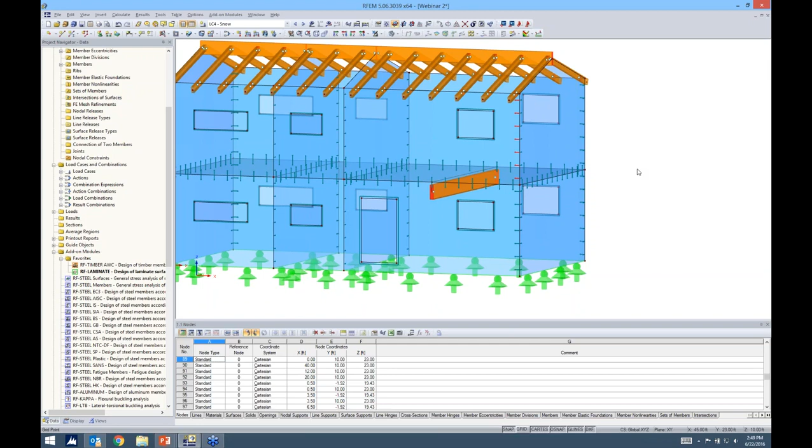I click OK. I'm actually going to use this option here that says select surfaces and automatically assign the lines. I think it's quickest. I click OK, and then here I can just select all of my walls, and you'll notice they're all listed here. I click OK, and now I have all of my line hinges assigned. And I can see these line hinges, I can double click them, I can edit them individually. So, it's a nice feature to use that tool. However, there's one thing that we do need to clean up.

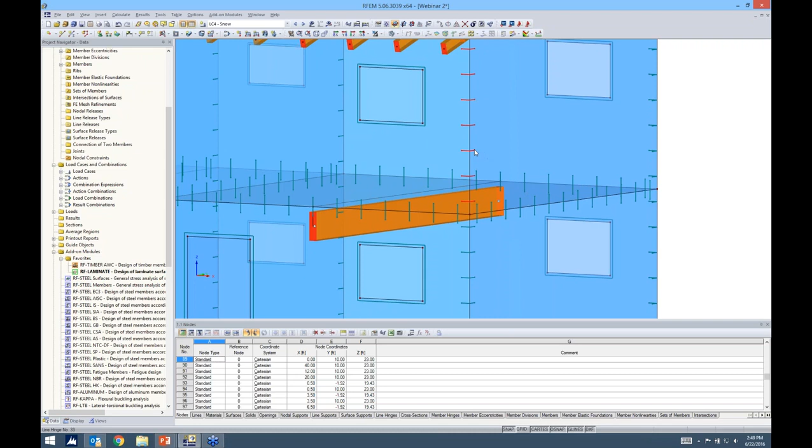Just like the example where you have two members that are framing into each other and you cannot define the member ends both as pinned. You'll get an instability. You need to have at least one rigid member, and the other member framing right into it can be defined as pinned, but if you define them both, we get issues within the program. Same for wall panels. We don't want to define two wall panels framing together both with a line hinge. We actually want to delete one of those.

So I'm just going to go ahead and hold down my control button, and all I need to do is select them graphically and I click delete. Now let me go ahead and do so on the other side, again just by holding down my control button, and I can click delete. Now you might ask yourself the question, well, I see two line hinges here, but the reason why is because my floor panel is also framing in here, which doesn't have a line hinge. Therefore, we're stable for this particular intersection.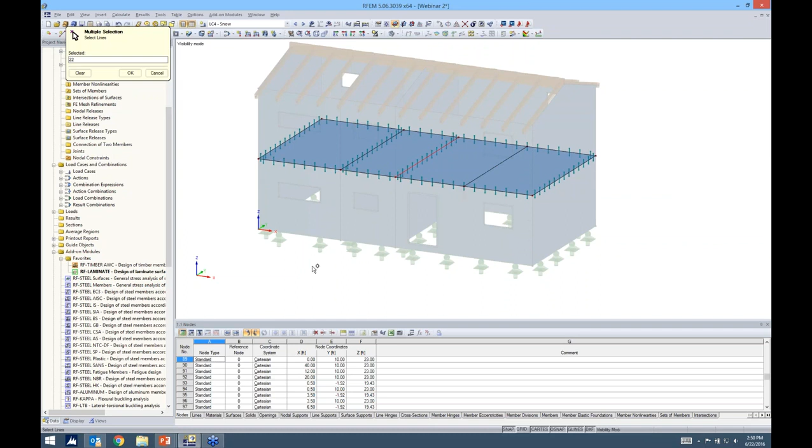The last thing that I want to do is add one more line hinge to my floor. So if I go ahead and create my visibility by selected objects, I go to my insert model data, line hinges graphically. This time I'm going to select the surface and then the line. So all I need to do is select the surface first, then the line, and click OK, and then you'll notice that here I have another line hinge, and I still have my one rigid surface framing in right here. Okay, so canceling this visibility mode, I'm going to jump back into RF-LAMINATE.

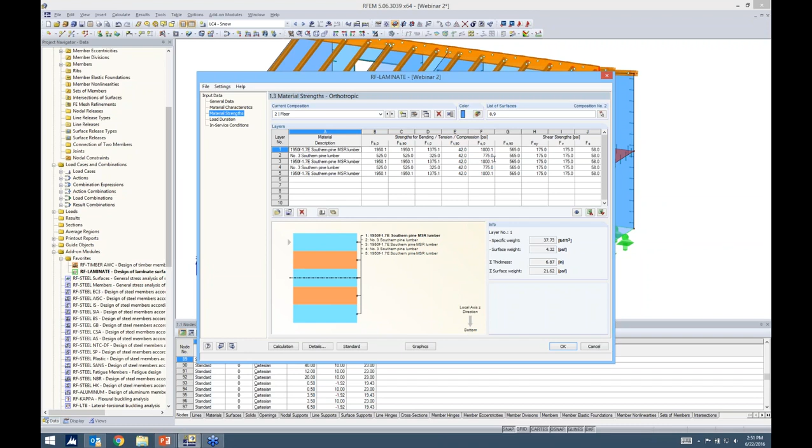And I just continue working down my list here. Material strengths, this looks very similar to material characteristics. It's just giving you your strengths for bending, tension, and compression based on what the code is telling us. Load duration, this is just from our loads that we've already entered into RFEM, so you can see that everything's automatically linked here. Everything looks correct except for maybe wind. We want it more as 10 minutes for our load duration. Then the load combinations for ASD are automatically updated with the correct load factor.

In service conditions, is your panel dry or wet? All of ours will be dry. And then you can go ahead and click on the standard button here, and we get some other factors that are applicable to our strengths, our capacities. What's nice too is that we have all the references to the code here. So you never have to guess, for example, where load duration comes from in the code. We give the reference right here, so you can flip open to the code and take a look at that.

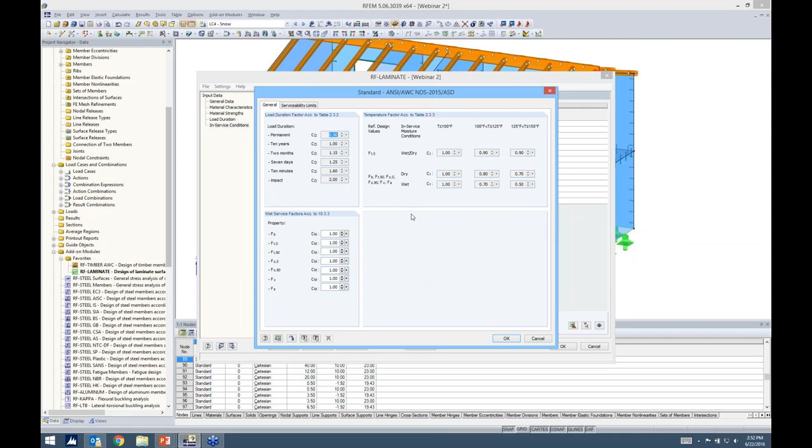Okay, so with that said, I would go ahead and run the calculation now, it takes just a minute actually, but instead I'm just going to jump to a model that's already been solved. So let me pop open my RF-LAMINATE module. And like I said, this is the exact same model. I just have all my solution done right here. So you can see that now my results have popped up. My max stresses are given as a ratio by loading. So we can see here that we have load combination 14, load combination 15, and so forth.

Then you'll also notice that there is a stress check for every single bending, tension, compression. Every check in the code that requires shear will all be listed here. So that's one awesome thing about RFEM, is that we don't just give you the controlling ratio. We give you every single one of them. So that way you can really understand what all the different load checks are. As we scroll through these, you'll notice that our diagram is changing for all of them.

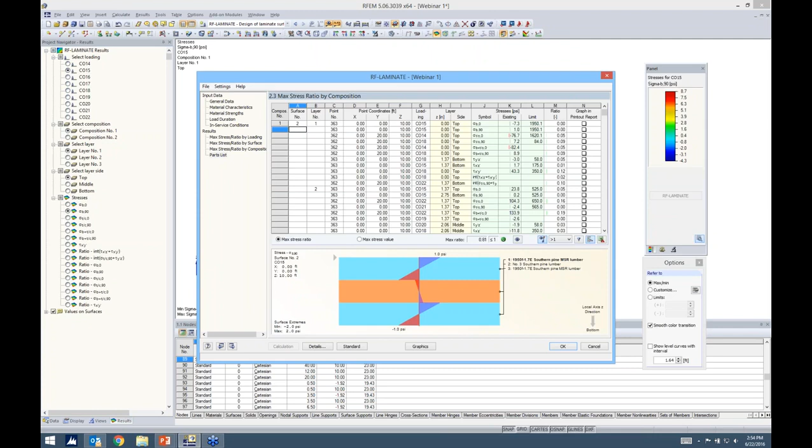But let's say maybe I really am only interested in the max load check. Well, I can actually just filter it according to the max here, and it jumps to the load combinations that are controlling. You'll also notice that if we go back to the full list, regardless, we get our max ratio listed right here. We have a nice green smiley face, so we're below 1.0. These other options are basically just rearranging your results. This is according to surface, so now surface number 2 is listed here. And then we have composition, so our walls and our floor that we created. We also have our material takeoff here. Engineers might be interested in this.

For their calculations and such, go ahead and put this report in there. So that is available in this module.

Now the other thing we can do is jump to our graphics, and you'll notice our results bar is here now, and we can actually view all of the different stresses. Although we had it in table form, maybe we want to see it graphically. So we have all of our stresses here that we can view.

We have composition 1, which is our walls. We can jump to composition 2, which is our floors. So, very powerful in terms of the graphics as well.

And then we can even view our ratios as contour lines as well. You'll notice everything's blue because we're well below 1.0. If things were closer to failing, it would be closer to that red color.

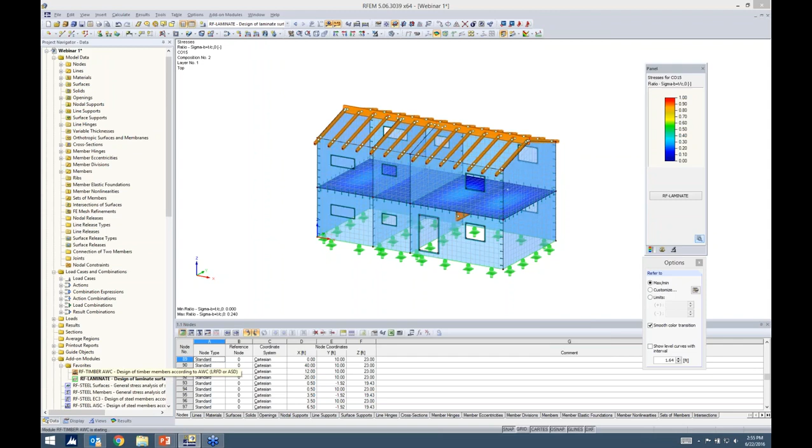Okay, with that said, I am going to jump into the Timber AWC module. Lucky for us, the module looks almost identical to the CLT. This is pretty much the case for all of our add-on modules. So when you're opening up, whether it's dynamics, steel, or timber, all of them look very similar. So there's no need to learn all the different modules. It's going to be intuitive no matter which one you're in.

You can see here that we can choose design according to ASD or LRFD. I'll go ahead and choose ASD. I have my members just checked as all now. We can also do member sets so that we create design so that all the members are maybe optimized to the same size. So quite a few options there.

This is similar to what's in our steel module, to our concrete module. Now for the actual design load combinations, because I'm running ASD, I want to choose my ASD load combinations for my design. Serviceability, same thing as CLT.

If we wanted to take a look at maybe some deflections, I guess it's not in there. If we want to take a look at some of our deflection limitations, we can go ahead and choose that for serviceability as well. Fire resistance, we also have the ability to do fire resistance design. Again, you would want to choose the applicable load combinations for here, and we would get a few more options for fire resistance.

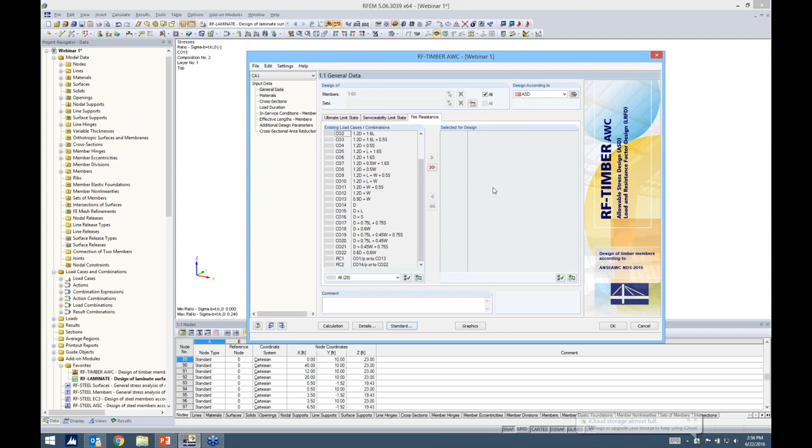Moving down the list to materials, you can see that concrete and steel are bright red. This makes sense. We can't design a concrete or a steel beam in a timber add-on module, so that's why these are not applicable. But you can see our timber materials are applicable. Laminate is not because we need to use the laminate module. Cross sections, same thing. If we had steel in here, concrete, it would be red as well.

Now you can choose to optimize these members. Let's say we're well below 1 or maybe we're above 1. We can optimize. So we get that question quite a bit, and that's certainly an option in these add-on modules. So you can optimize from the current row, which means it will choose one of the glulam Western species, or we can choose from our USA favorites list that I showed you before.

Load duration. This is the same thing as CLT. You can see here that our load cases were generated. We already have the load duration factors correct in here. In service conditions, dry and wet, pretty self-explanatory here.

Effective lengths. Now this is if you want to consider buckling, if we want to consider lateral torsional buckling, we need to come up with our L effective. So the default is the full member length, but if there are some connections in the program that will actually give you a shorter unbraced length, then we can go ahead and modify that here.

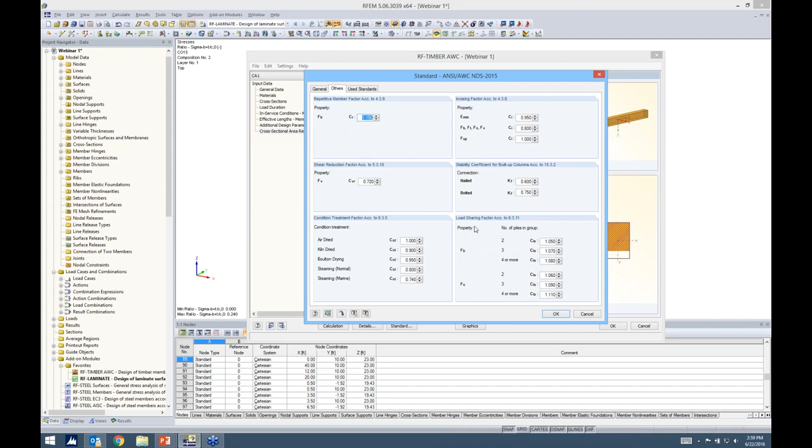If we click standard again, this just gives us a lot more factors according to the NDS. We have all of the references here, and I think as far as our timber module, we're very strong in timber, so we offer a lot more factors in comparison to maybe some other competitors. Stability coefficients for built-up columns, shear reduction factors, load sharing, everything is pretty much available here.

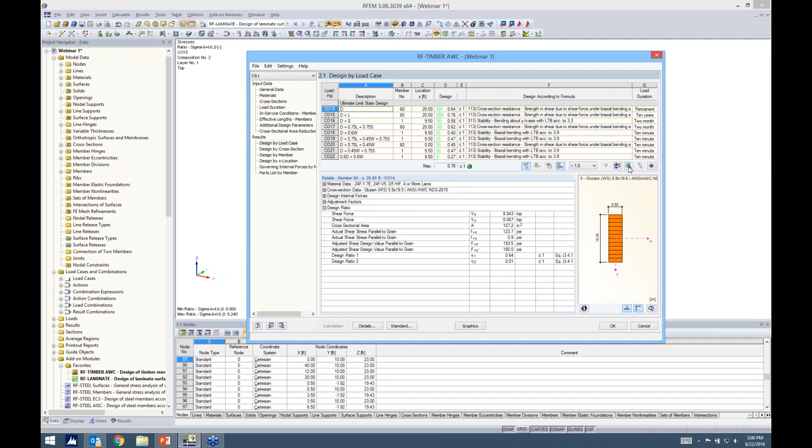All I need to do is go ahead and click the calculation button, and you'll notice I get my green smiley face. Again, just like CLT, I can filter if I want. Also keep in mind that throughout the program we have direct links to Excel, so you don't need to worry about copying and pasting - we can actually use this button to directly integrate with it. We get the design by load case.

Maybe more interesting would be the design by the particular member. Again, the program is so powerful that we give every single check and not just the controlling ratio. Even better yet, we give every single variable that's used. We list our cross-sectional data that's being used, our internal forces that we're comparing it to. So we get very little tech support asking where these numbers came from, or why this code check is controlling over this one - everything is listed here, so it's very thorough. And then, of course, the takeoff and parts list and parts list by members located at the end as well.

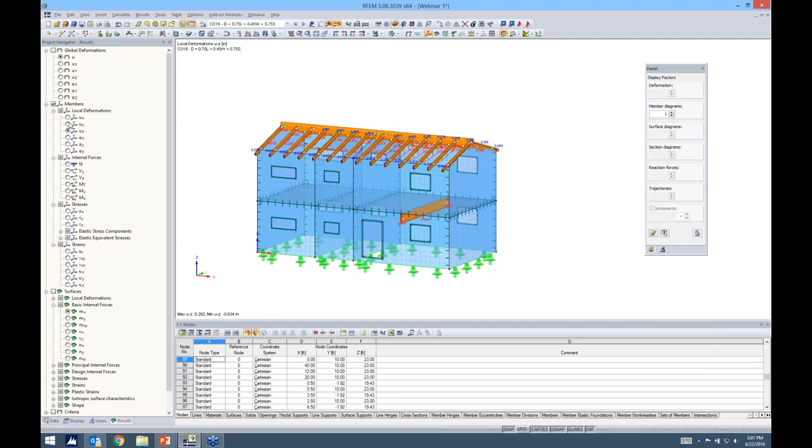We can view everything graphically. You'll notice for the NDS, we don't really have much to show here other than the design ratio, but you can always switch back to one of these load cases in RFEM to show your results for these different members here. We can show internal forces, which if I change this to wireframe, you'll be able to see a little bit better. So quite a few options in terms of running a timber analysis.

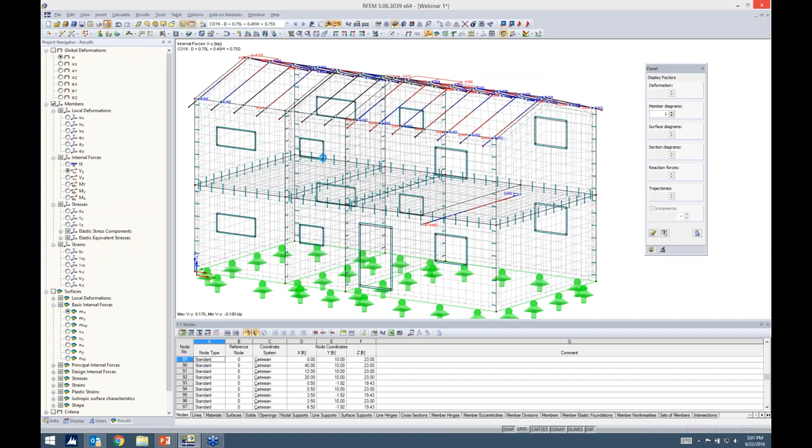Okay, one quick thing before we conclude the webinar - I just want to show you guys the printout report. Again, I think it's something that is quite powerful, especially in comparison to a lot of other printout reports you have probably dealt with from other software competitors.

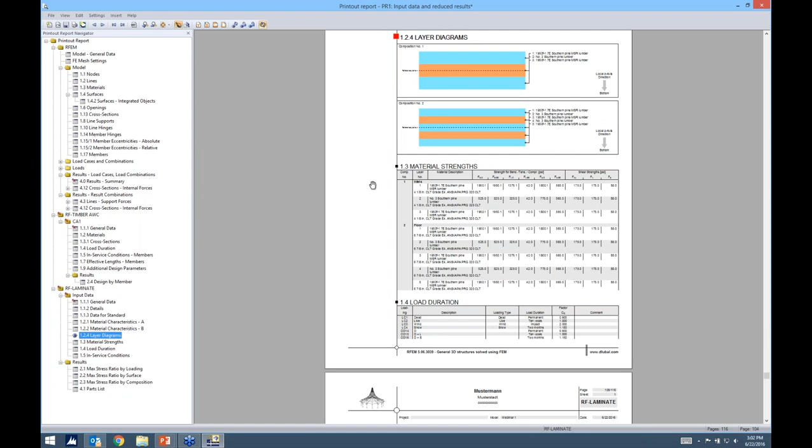You'll notice that a completely separate application pops up, and here's our table of contents. Let's say we want maybe cross sections before line supports - we can just drag and drop, and the program will automatically update that. But not only RFEM, we also have our add-on modules listed down here, RF-LAMINATE - everything was brought in from those add-on modules as well, including some layer diagrams. You can always add pictures in here, and if something were to change in your model, you don't have to worry about reprinting pictures - everything will be updated automatically. So everything's very synchronized within the program.